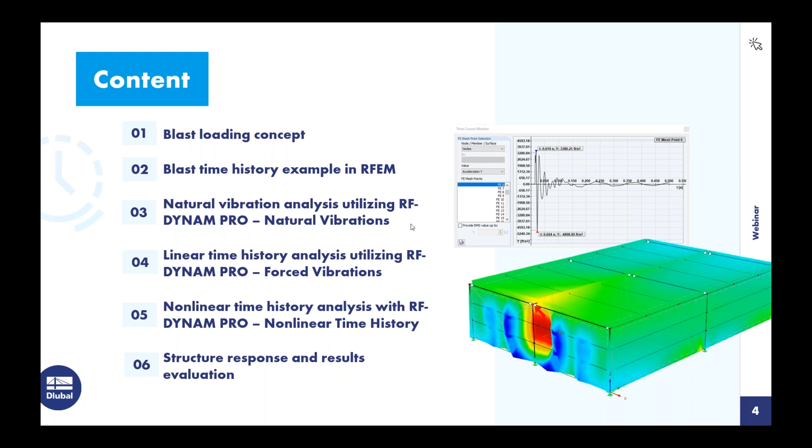Then we'll move on to a linear time history analysis utilizing RF-DYNAM Pro Forced Vibrations. Finally, we'll take into account any material or geometric nonlinearities with the additional add-on module extension, RF-DYNAM Pro Nonlinear Time History. Through all of this, we'll definitely be looking at the structure response as well as the results evaluation for each one of these.

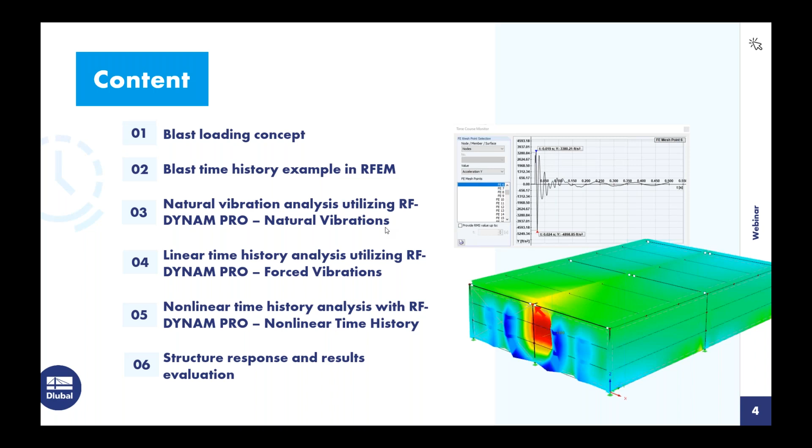Getting into the blast loading basics, as I mentioned we're primarily going to be referring to the AISC Design Guide 26, Design of Blast Resistant Structures. We'll also be making some reference to the United Facilities Criteria 3-340-02, Structures to Resist the Effects of Accidental Explosions.

There are many more references out there for blast time history, but for today's example I wanted to specifically refer to Design Guide 26, because this simplifies the time history analysis quite a bit and was just the best guide for today's example within the program.

What are the factors influencing structural damage when we talk about these types of explosions? Well, the structure material definitely plays a role, as well as the overall mass and stiffness. What else is important is the explosion type, as well as the distance to the structure. Clearly, a larger explosion in closer proximity to our target structure is going to cause a lot more structural damage than a smaller explosion located further away.

And finally, the blast orientation to the structure: is this located at ground level, is it up in the air, what proximity to the structure? And of course, if we're located in an urban environment, do we have surrounding structures that we need to consider as well? Now, the ultimate goal here is not necessarily to avoid extensive structural damage.

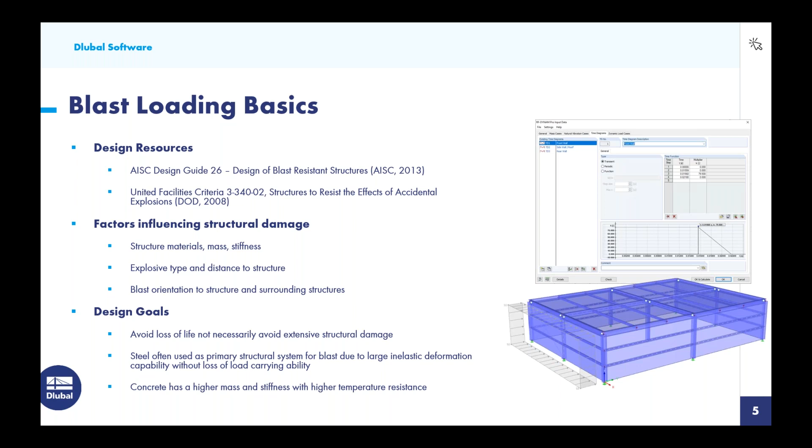Now, as far as the blast load application in terms of a time history, on the right-hand side we have what's called an idealized pressure time history for blast loads. There are certainly several theoretical approaches for exactly plotting this particular curve that we're seeing.

Just to cover a few of the basics, let's first begin with the peak overpressure. This is the pressure above the ambient atmospheric pressure, hence the name overpressure. It's an instantaneous pressure that arrives at the structure. In this diagram we have a short period where nothing happens until the time of arrival, then that instantaneous rise for the peak overpressure applied to the structure.

The positive phase duration is the time period it takes for the pressure to return back to ambient, or back to zero, indicated in the positive portion of the diagram. We also have what's called the positive impulse, which is the total pressure time energy applied during the positive duration — the area under the curve.

And finally, we have the negative phase duration. This includes the energy, again the impulse, which is the area underneath the curve that follows the positive phase, where the pressure falls below the atmospheric pressure.

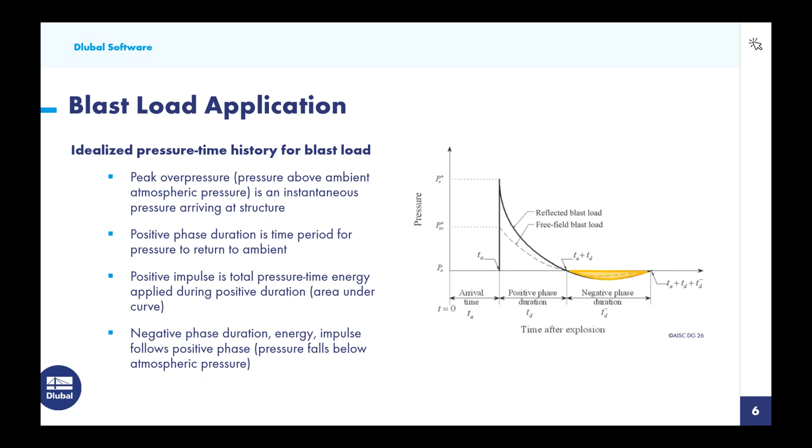Turning to the two different lines on this diagram, we have the reflected blast load shown in a solid line, and the free field blast load shown with a dotted line. So what exactly are the differences here?

We'll start with the free field blast load, indicated by the dotted line. Notice the magnitude is much lower here. This is what we call the free field or side-on blast load, where the blast wave travels parallel to a surface, sweeping over it with no impeding objects. We might see this with sidewalls, roof elements, or the rear wall, which is what we'll be noticing with today's example. Typically, in most literature, we'll see the subscript SO used for side-on.

Now we also have the reflected blast load, where the blast wave strikes a surface other than parallel, at an angle. A perfect example would be any surface normal to the explosion, such as a front-facing facade. Obviously, we're going to have much higher pressures here than with a wave sweeping over surfaces parallel to it.

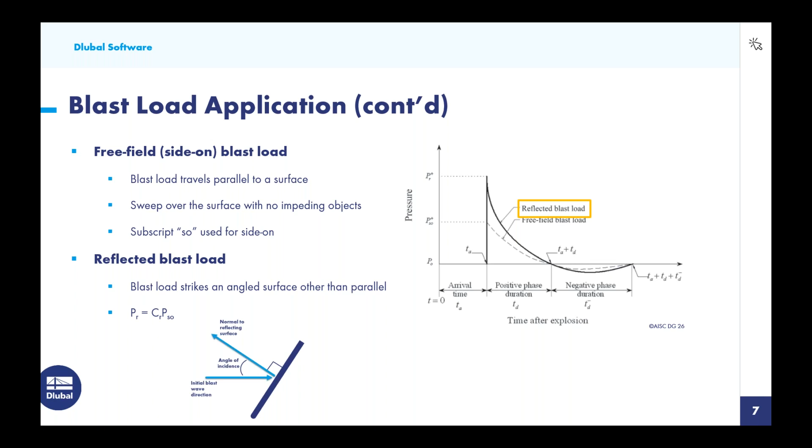So we calculate this reflected pressure with what's called the reflected pressure coefficient, multiplied by the side-on pressure, given by this equation. Referring to the UFC document, there's a nice figure here, 2-193, where you'll notice the angle of incidence given on our x-axis.

Then we would locate our peak incident overpressure, and follow this along to determine what our reflected pressure coefficient should be.

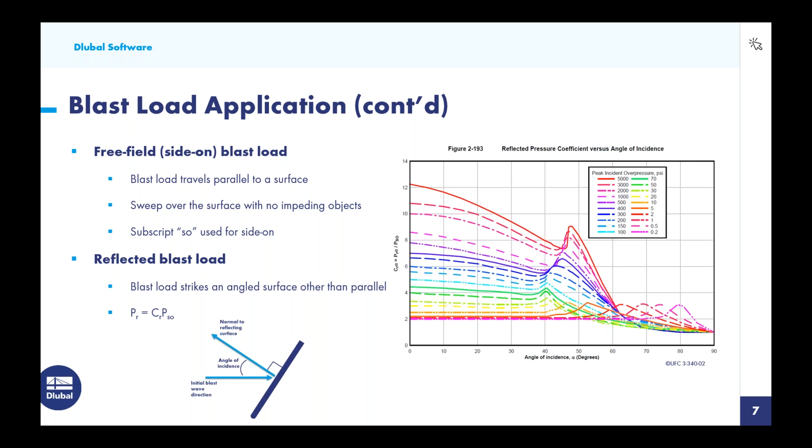So what exactly is the angle of incidence? If we look at this small diagram in the lower left, we have our initial blast wave direction. It will reflect off of this surface normal — a 90-degree angle here — which will produce an angle of incidence. This is the value we want to locate within this figure to determine what that coefficient will be in order to increase those reflected pressure loads.

So moving on to the blast load simplification, we're primarily referring here to AISC Design Guide 26. Let's first start off with the pressure time history positive phase.

What we're going to do here is simplify it to a triangular distribution, but we still want to maintain that instantaneous rise as well as a linear decay now — quite a simple application compared to the more theoretical approach shown in the background. It's important that the peak pressure as well as the impulse are preserved, and remember, the impulse is the area underneath the curve.

Therefore, we have to come up with some other fictitious duration in order to maintain both P and I. This is estimated to be approximately 2 times I over P.

When we're talking about the negative phase, we're actually going to neglect this for the demonstration today, just for simplicity. Now, as engineers, we don't necessarily always want to neglect this — it could be important when we have elements on our structure that are weaker in the reverse loading direction, or we should also consider it for short natural periods compared to the load duration.

Some other considerations we will not be taking into account today include the drag forces due to wind or dynamic pressures — do we have a large wind load following along with this blast wave as well? Both Design Guide 26 and the UFC document, among others, give consideration to these drag forces, and whether we have large openings to account for interior loads due to leakage.

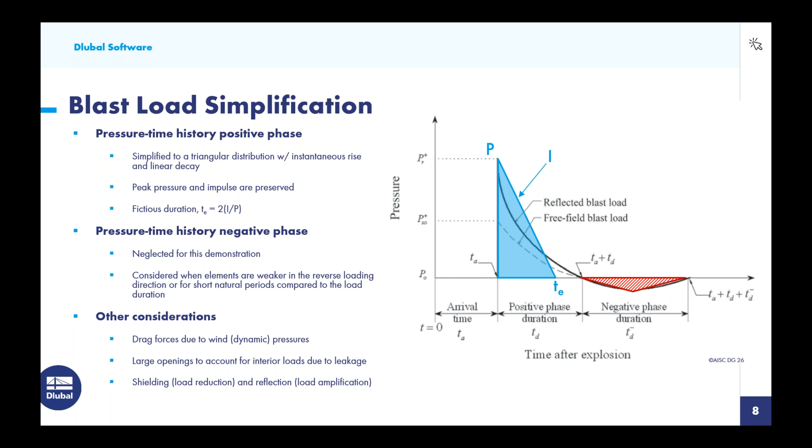On the positive side, we have what we can consider shielding, which is load reduction. When we have a blast wave and many other objects in front of our target structure, the load will be reduced. But on the downside, we have what's called reflection, where the load can actually be amplified because it's reflecting off of all of these different objects directly onto our target structure.

So let's take a turn now from these basics and take a look at RFEM, which is our finite element analysis software. This is the main program where we'll fully model the structure. We can load it with general static loads and run a full analysis.

But when we're talking about dynamics or any type of time history, we do need to utilize our dynamic add-on modules. We actually have a total of 4 of them. The first is RF-DYNAM Pro natural vibration.

This is a prerequisite. We have to go ahead and run the natural vibration analysis before we consider any of the rest of these dynamic analyses listed here. This is going to run the eigenvalue analysis, determine the mode shapes. We can take a look at angular frequencies, natural periods, and we'll definitely be doing that today.

The second add-on module, RF-DYNAM Pro equivalent loads. We actually will not be getting into this add-on module today. It's much more focused on seismic, and in particular a response spectrum analysis according to the ASCE 7, the NBC, and various international codes as well. I've done previous webinars on this topic, so refer to our website and YouTube channel if you want to learn more about that, but we won't be getting into that today.

RF-DYNAM Pro forced vibrations does allow us to run a limited response spectra analysis. We can also take into consideration accelerograms, but what we'll be utilizing it for today is to run a linear time history analysis for these blast loads.

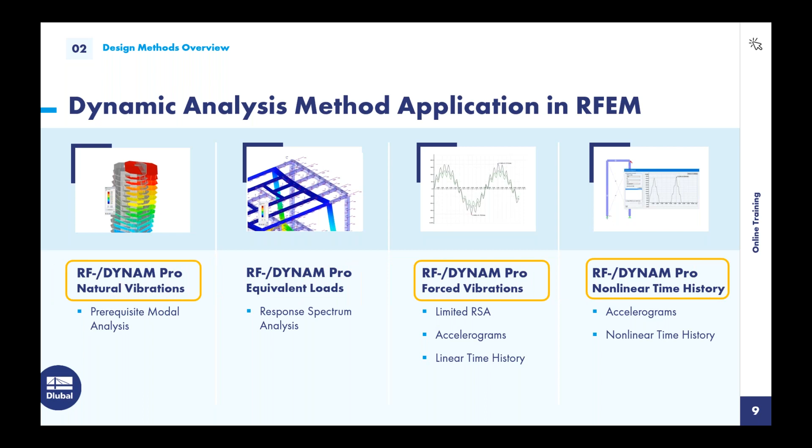So now moving on to our example. Again, I'll be referring to AISC Design Guide 26, and in particular example 2.1. The example within RFEM will follow very closely with this today.

We can see over on the right-hand side, directly from Design Guide 26, a plan view of our structure as well as an elevation view. It's a 1-story steel building and the dimensions include a 50-foot width, a 70-foot length, and then we have 15 feet in height. In the short direction, we will have braced frames, and in the long direction, we have rigid frames. Everything will be composed of hot rolled steel sections, and then for my roof deck as well as my wall panels, we will be modeling ribbed metal surfaces here.

Now, the blast load will take place, and we can see that indicated over here on the left, with a charge weight of 500 pounds, and it is 50 feet away from the structure. So we can see it's normal to this front short face here.

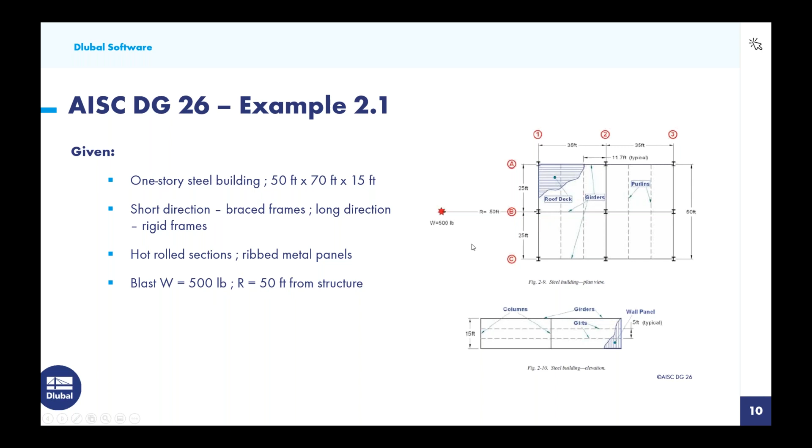So in order to consider the time diagrams for our time history analysis, we actually need to now move through the solution to determine what all of these different variables are. We begin with the scale distance, indicated by the variable z. Z is given to us by r over the cubed root of w, which is simply 50 feet away from the structure with a charge weight of 500 pounds. Then we're going to get 6.3.

On the right-hand side, you'll notice an additional figure taken from that UFC document, figure 2-15. This plot is showing the air blast parameters versus the scale distance. So we see the scale distance z that we just solved for on the bottom x-axis. Now there are some assumptions here with using this particular figure. You can see it's a positive phase shockwave parameters for a hemispherical explosion.

Not spherical, not located up in the air, but located at ground level and also at sea level. If you have a target structure that you're designing a blast load for something other than sea level, there are scaling approaches that you can take to scale this to meet those needs. It's also conservative here to assume a fully reflected surface, and that's what this plot is giving to us.

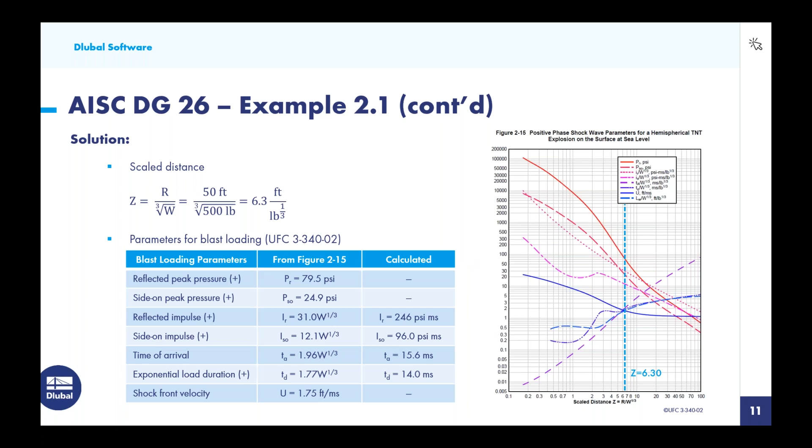Now let's talk about the reflected pressure. This would be applied to the front wall, and we are going to take the Design Guide 26 approach with the equivalent triangular shape. We want to utilize the peak pressure, P sub r, and the impulse, I sub r, and we want to preserve these values. We can see these given on the right-hand side, but remember, on the previous slide we got this information, P sub r and I sub r, directly from this figure. So it's easy enough to come up with this equivalent duration for the positive phase blast load with the estimated value of 2I over P, which equals 6.19 milliseconds. This is all that is required for our reflected pressure for the front wall time diagram.

Moving on to the sidewalls and the roof, what we'll be applying here is the side-on pressure. This is the smaller triangle within our idealized curve. For simplicity as well as the conservative approach, we're actually going to use the same scale distance Z that we use for the front wall centerline, also for the sidewalls and roof. Realistically, we could maybe calculate a larger Z to decrease our magnitudes, but again, for simplicity and the conservative approach, we'll just use those same values. Therefore, we need to calculate T sub E. We have P sub O and I sub O from the previous slide, so 2I over P equals 7.71 milliseconds. This is all that is needed for our time diagram for the sidewalls and the roof.

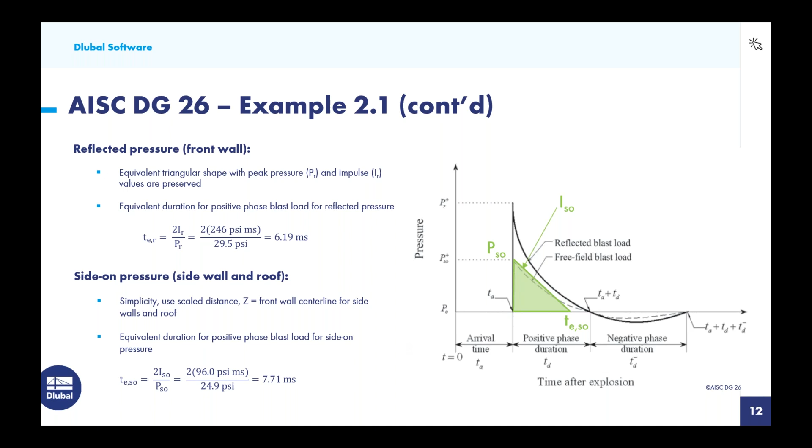Now the final step here is the rear wall, which is a little bit different than the previous two structure portions. The advantage here is that our charge distance is going to be increased. We have our blast taking place about 50 feet away from the structure face. We can also consider the full length of the structure of 70 feet, so our new charge distance is now 120 feet. We calculate the scale distance with that new R value and we get 15.1. So at the front of the structure we have Z equal to 6.3, and at the rear we have Z equal to 15.1.

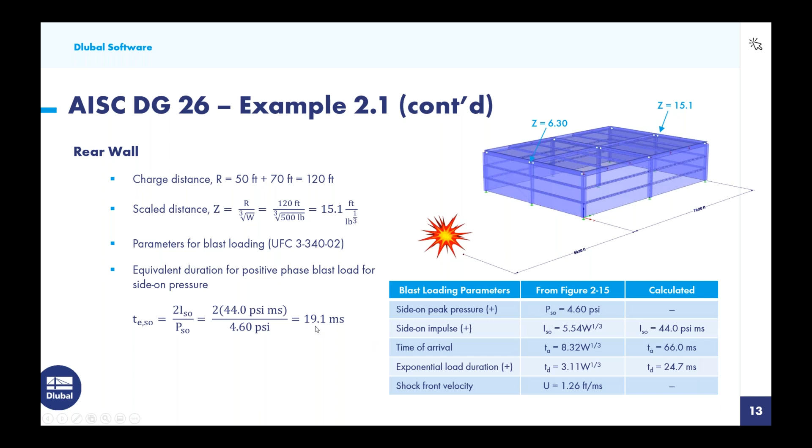Once again, we refer back to the UFC document to figure 2-15. We take a look at Z equal to 15.1, and here is a summary of all of our parameters. Notice that I only listed the side-on peak pressure and side-on impulse rather than reflected. This blast load is going to sweep over the rear wall. We don't have any type of reflected load occurring here, so that higher magnitude is not of interest to us. Now we do need to calculate that equivalent duration for the positive phase blast load, and again we run this calculation with 2I over P using this data with our new Z value, and we get 19.1 milliseconds.

Now it's also slightly different here in that for our rear wall, it's going to take the blast wave a little bit of time to ramp up to that full peak pressure. It's not instantaneous like what we're seeing with the front, side, and roof. So how do we calculate this? Well, we know the estimated time of arrival is 66 milliseconds.

We calculated that from figure 2-15. What we now need to calculate is this time to the peak pressure, T2.

That's really easy to calculate, because we'll take into consideration T sub A, the time of arrival, and add on L1 over U, where L1 is the span of the element parallel to the traveling wave. In our case, it's how long it takes for the charge to reach the top of the wall, which is 15 feet in height. U is the shock front velocity given to us from the UFC figure 2-15. So we take this length, divide it by velocity, get a time, and ultimately get 77.9 for T sub 2.

Now the time to the end of the blast is just going to be T sub 2, and we add on that estimated time we calculated on the last slide of 19.1 milliseconds, giving us 97 milliseconds.

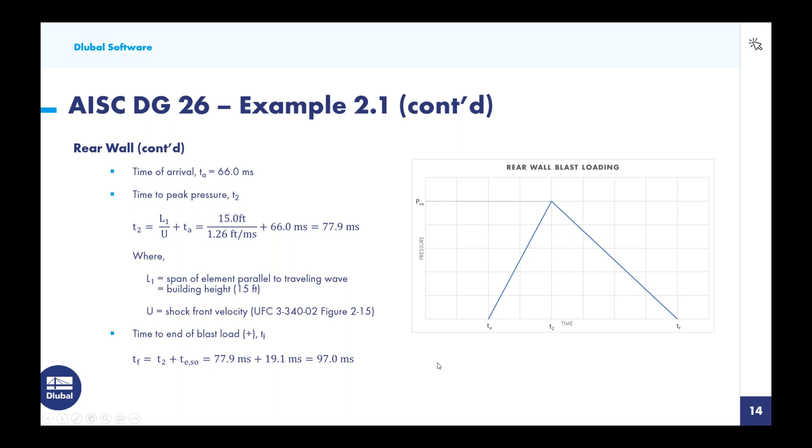A few assumptions I wanted to reiterate: we're using this equivalent triangular loading function over the more exact loading function. There are more theoretical equations, such as the Friedlander approach, if you wanted to calculate that curve exactly. We're also going to neglect the negative phase of the shock, as well as other variables I mentioned, like dynamic pressure, openings, and so on.

Finally, for simplicity, the full side-on pressures are computed for the non-reflected surfaces—this includes the sidewalls, the roof, and the rear wall. This is the full value here; in the UFC document, there are load averaging techniques to decrease this magnitude. So a lot of the approaches we took today are definitely more simplistic, but also more conservative. The UFC will have much more information if you want to get into more detailed analysis.

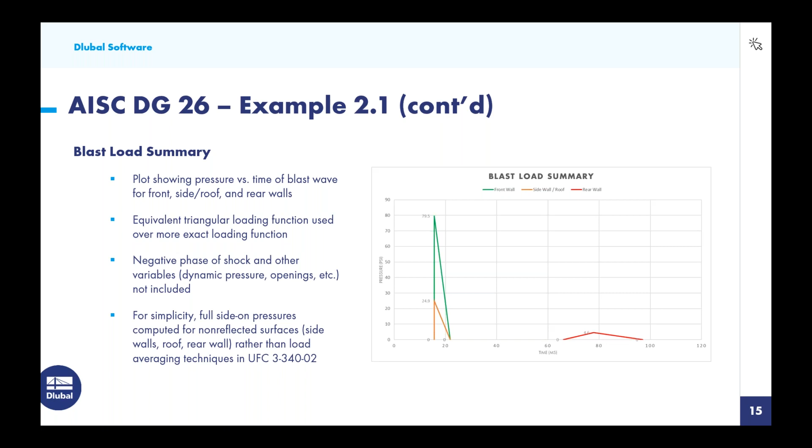All right, so now we're ready to get into RFEM. You'll see the structure already modeled here—this is exactly from the PowerPoint as well as Design Guide 26 that I mentioned. It's just a basic one-story steel structure, 50 feet in width, 70 feet in length, and 15 feet in height. We're going to assume the explosion happens over here on the left-hand side, normal to this front face.

To quickly cover a few of the cross sections used in this example: for my columns, I have W14 by 193. Up at the roof, we have W18 by 130, used for the main beams and main girders. We also have our purlins, which are channel sections—channel 10 by 25. And then we have our girts, which are again channel C10 by 30 sections.

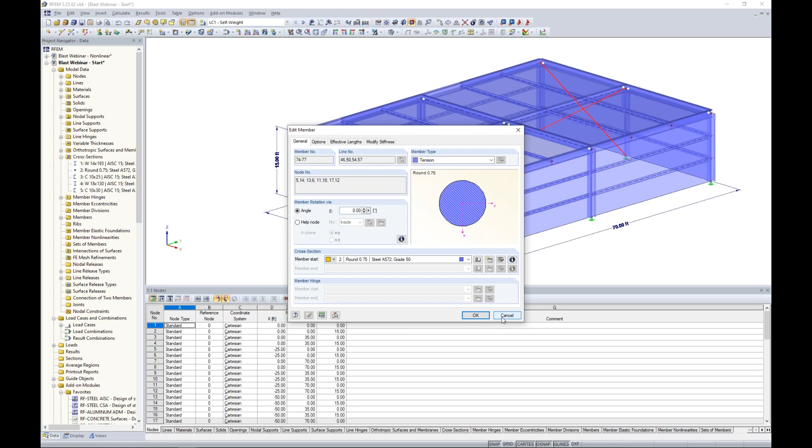It's also important to know—if I highlight these elements—we have a couple of X braces. Remember in the problem statement, we have braced frames in the short direction and moment frames in the long direction. I added this lateral bracing here, and if I double click on it, you'll see these are tension-only members, so in the program they will take only tension forces—some type of cable element, we'll assume. When the program experiences compression within these elements, it will completely take it out of the analysis, but RFEM, being a nonlinear analysis, can reactivate these if we see tension again in a subsequent iteration. So let's keep that in mind for those X braces.

Now, looking at the surfaces, for both the roof and the walls, what I went ahead and modeled here are orthotropic stiffness surfaces.

And it's just a general steel A653 grade 40 material.

When we go into the detail settings of this orthotropic stiffness, we'll see that I have set this to a trapezoidal sheet. What's convenient with this option is under the second tab, I can simply put in the sheet thickness and some of the geometric variables for my ribs, including spacing and so on, and the program will automatically calculate my stiffness matrix for me.

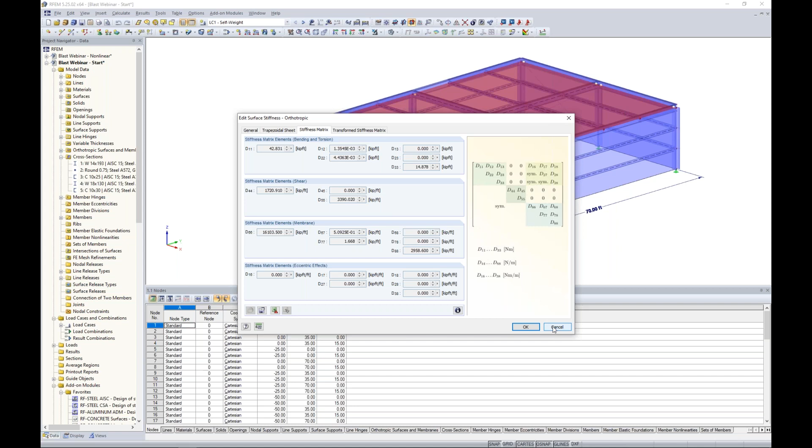So this is definitely going to add a lot of lateral stability to our structure at that roof level. I went ahead and used it for the wall elements as well. That is a basic overview of our surface elements as well as our members.

So under my display, what I'll do is go ahead and turn off my dimensions here. And let us discuss the loading.

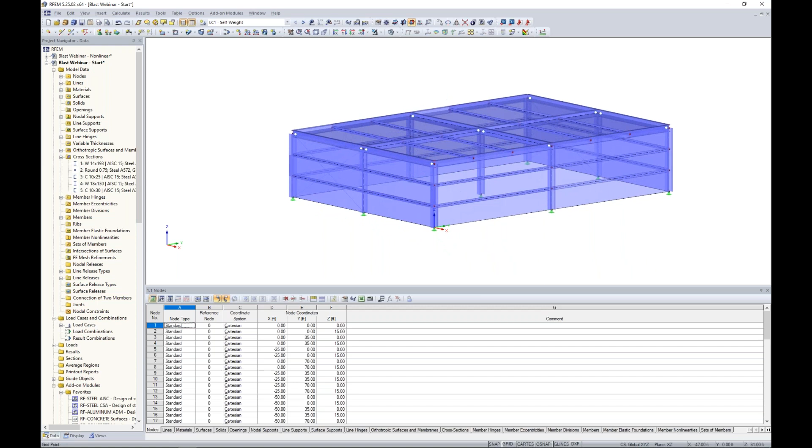I've created 4 separate load cases here. The first is going to be self-weight, and the self-weight is exactly as it sounds - it will account for the self-weight internally of all of our members and surfaces automatically. But I've also added in a general member load up at the roof level to those main beams and girders, 0.1 kips per foot, to account for any additional dead load that we may have up there.

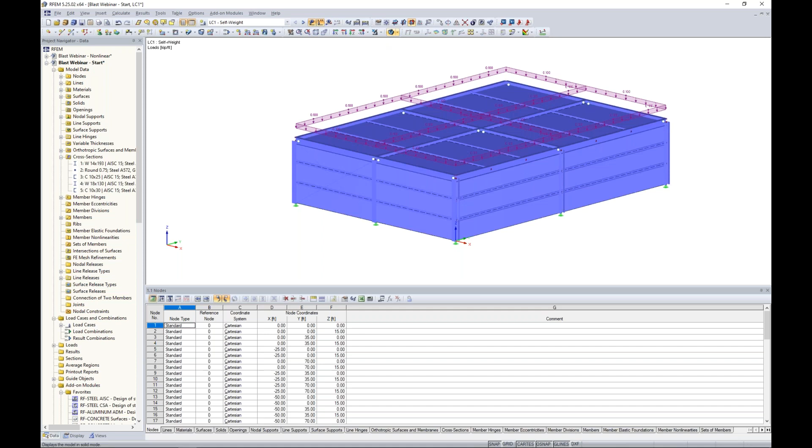Now the next load is going to be for my front wall, and we can see this load applied as an area load. This is to initially account for that blast load acting on this front surface. So this area load here is a bit special because it's going to convert the area load to member load.

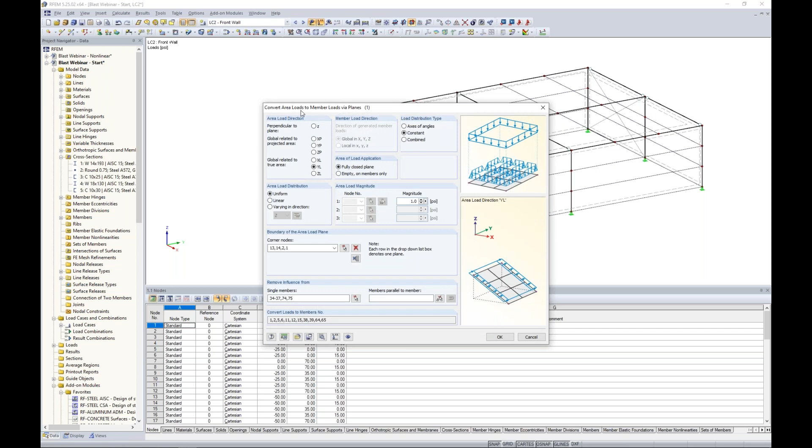So I'm not necessarily applying it to this surface, but rather I want it to be applied directly to these main lateral resisting frames. And you can see that the magnitude is set at 1 psi.

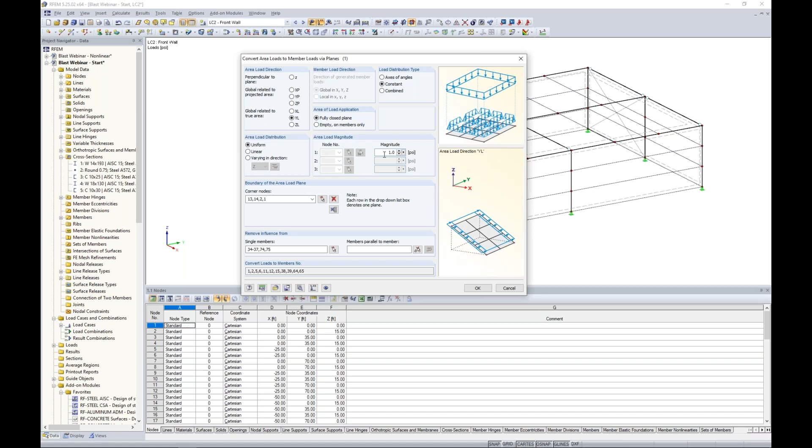We want to use a very arbitrary value of 1.0 here. Later on in the time diagram, I'm going to tell the program how this magnitude will increase or decrease and vary over time with the actual time history analysis. But for now, we want to set this to 1.0.

So you can see that with this front area load, if I right click and display separately, we can see those as member loads based on their tributary width applied directly to those frame elements.

In a similar fashion, if we take a look at load case 3 here, we have area loads on the sidewalls as well as area loads on the roof. Once again, all of the magnitudes are 1 psi. If I right click and display separately, you'll notice that I applied them to those main frame elements.

I did not apply them to any of the channel sections for the girts or the purlins, and again I did not apply directly to the surface. I'm more interested in the structural response of these main elements included in our frames.

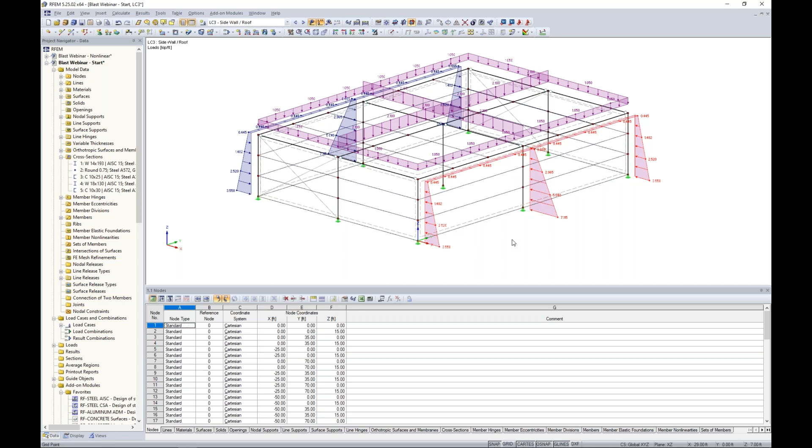And finally, we'll take a look at our last load case here, and we have an area load applied to the rear of the structure, normal to that rear facing wall, 1 PSI. I can right click to display separately, and we see those member area loads applied directly to those elements as well. So a very basic application here.

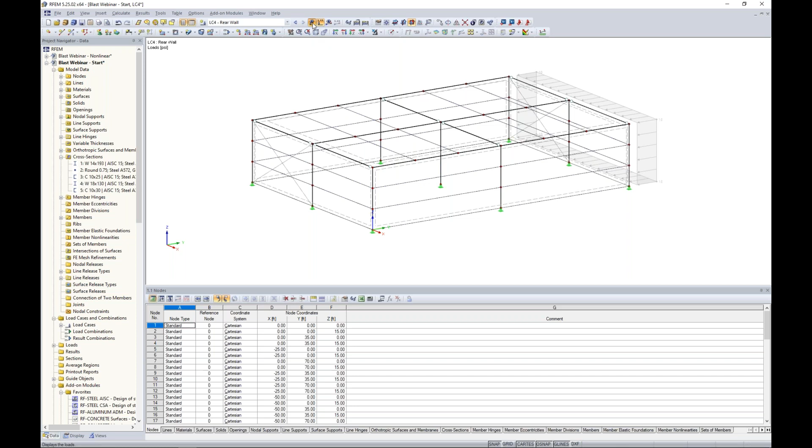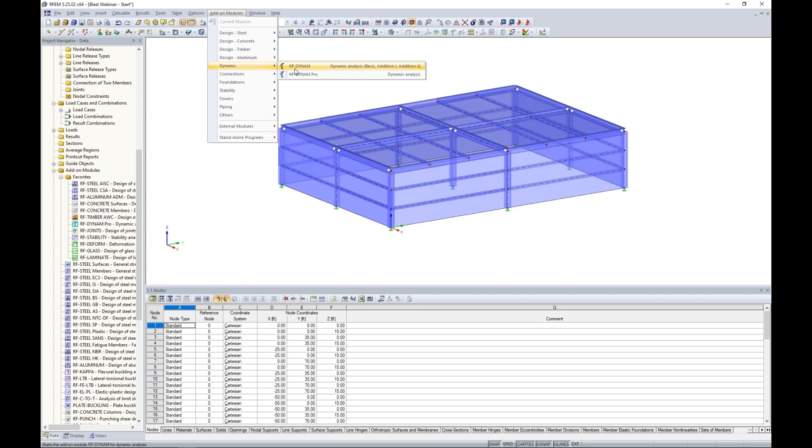Now we're not going to spend any more time within RFEM, but rather we want to move into the dynamic analysis. So what I'm going to do is launch RF-DYNAM Pro, and we can see in our project navigator here is our long list of add-on modules. So you can find RF-DYNAM Pro here, or we can go up to the add-on modules and find it categorized a little bit better under dynamic, and we launch RF-DYNAM Pro.

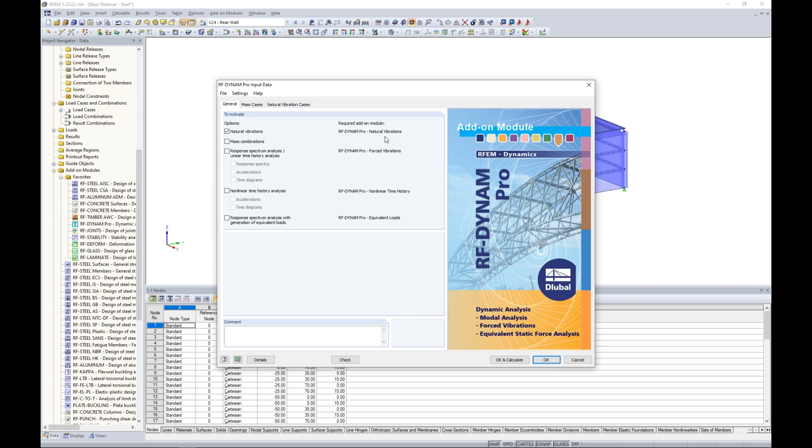So this add-on module is going to be nothing more than just a simple dialog box that pops up, and here are those 4 different dynamic modules that we discussed in the PowerPoint. You'll notice by default, the first one activated is RF-DYNAM Pro natural vibration. So again, this is a prerequisite - we have to run this natural vibration analysis before we move on to any of the additional add-on modules.

I also can activate here my mass combinations tab, and we'll get an additional option here. This is if we wanted to combine multiple mass cases into a combination. I won't be doing that for today's example, but that is an option.

So really, we just need to move from left to right here with our tabs. So the first mass case, I'm actually going to import in, if you remember, that first load case, which includes self-weight as well as that member load applied to the roof structure for those various elements.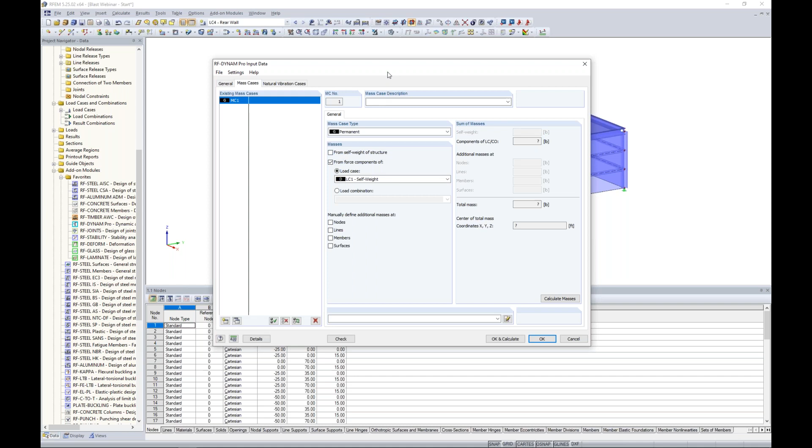Now I'm going to uncheck self-weight of structure here. If I leave this checked, we're accounting for self-weight twice, which would be incorrect. We also have the ability to define additional masses at nodes, lines, members, surfaces, and we can deactivate masses, so there are a lot of possibilities here.

For now, we'll just stick with this single mass case and move on to our natural vibration cases. We want to initially tell the program how many eigenvalues to calculate. For my structure today, I'll set this to 30. The scaling of the mode shapes will be left as the square root sum of the squares, and we can move on to the calculation parameters.

Under this dropdown, we want to select either our mass case or our mass combination of our acting masses that we want to consider for the natural vibration analysis. In our case today, we only have one mass case, so that's what's available.

As far as the directions or about which axes this mass is acting, this is somewhat dependent on the type of mass matrix. With the diagonal matrix translational degrees of freedom, some of these options above are grayed out, but as we scroll through these - translational and torsional degrees of freedom, rotational - we have different options available to us. So we'll be moving forward with the diagonal matrix translational degrees of freedom for today.

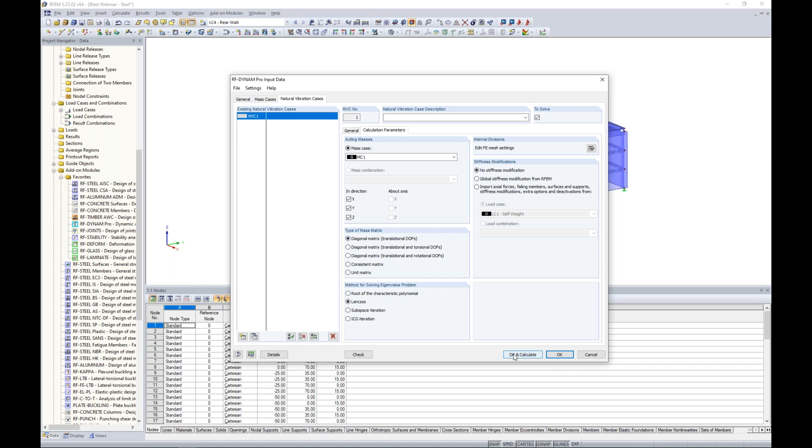As well as the general Lanczos solver. Our help file, which you can locate at the lower left-hand corner, will give much more theoretical background on some of these different options and how it might improve the calculation for your particular structure. So once we are done setting all of our natural vibration case data, we can go ahead and run the calculation, and you'll see for today's example this solves rather quickly.

So we are presented with our results of the dynamic analysis back in RFEM. We're technically still within this add-on module, which we can see from the dropdown box here. We also want to view this information in Table 5 for dynamic analysis.

Let me go ahead and redock my tables here. What you'll notice within this table is the natural vibration case is given to us within this dropdown - that's all that we've solved for. But right next to us are all 30 of the mode shapes that we told the program to solve for. So we can scroll through these different mode shapes just to see how the structure is responding under the given frequencies.

I always recommend immediately jumping to this effective modal mass factors tab. If I scroll all the way to the bottom, this tells me the mass participation. It's shown at 95% in the X direction for a sum of all 30 of our eigenvalues, and 96% for a sum of all the eigenvalues in the Y direction. This is great mass participation - we like to see something around 90% or more.

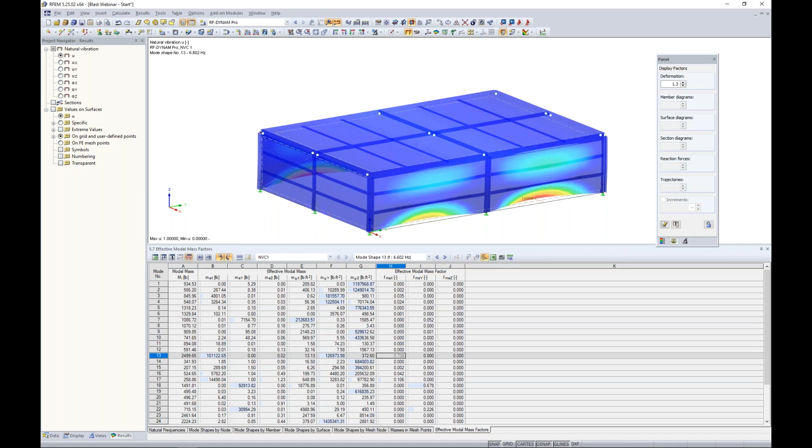What else I want to pay careful attention to is what we call the dominant modes. If I look at a lot of these early modes, they really don't have much mass participation going on until we get down to mode shape 13, where we have 74% participation in the X direction. Then going a little further, I see my dominant mode in the Y direction - this is 68% in the Y direction.

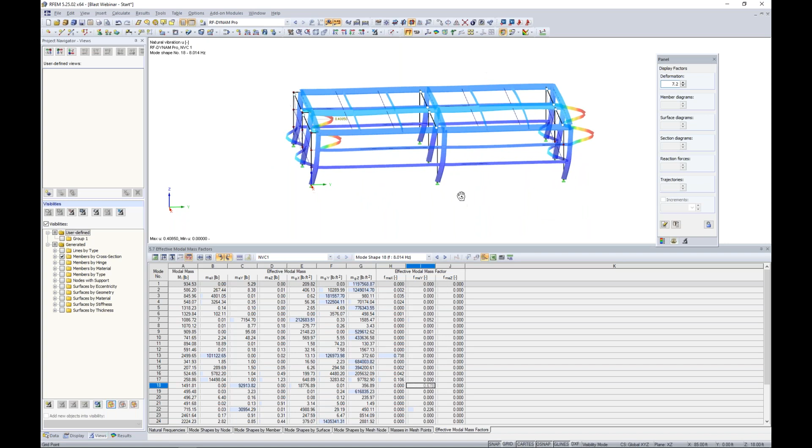What might also be helpful is under our Views tab, we can deactivate our surfaces here. Maybe we increase our deformation so we can really see a response of the structure as a whole. Now, of course, there are some more local modes with these girts, but overall, this is certainly our dominant mode in the Y direction.

Keeping in mind mode shape 13 and 18, we jump back to this first table, natural frequencies, and I'll highlight mode shape 13 as well as mode shape 18. For these two dominant modes, I can now determine my angular frequency, my natural frequency, and my natural period. We might be thinking, well, what does this really matter for a time history analysis? But this actually does come into play a little later when we're talking about damping considerations. We'll leave this highlighted in the background for now - it's great to understand which are our dominant modes for the structure from the natural vibration analysis. So let's go back into RF-DYNAM Pro then.

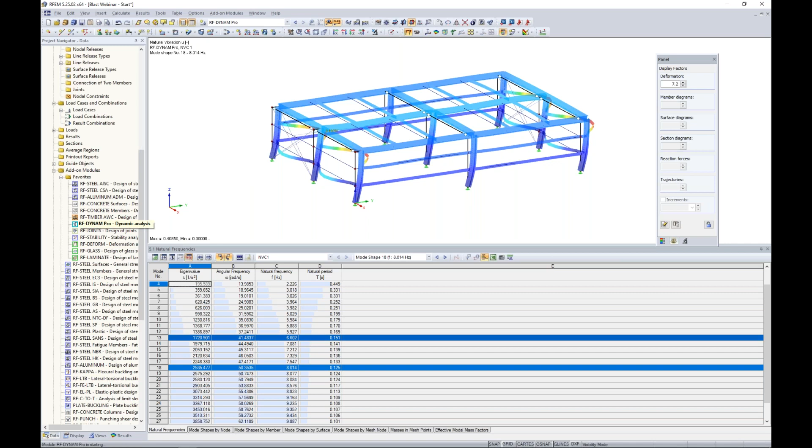And what we can do now is activate RF-DYNAM Pro forced vibrations for time diagrams. We get two additional tabs up at the top. Everything that we've just input for the natural vibration case remains the same, so no changes to be made there.

But now we want to move on to our time diagrams tab. This is where we are going to input the information that we solved for within the PowerPoint, to tell the program how these loads that I've applied back in RFEM as load cases will vary with magnitude and over time due to this blast load. So the first time diagram we want to specify is going to be our front wall.

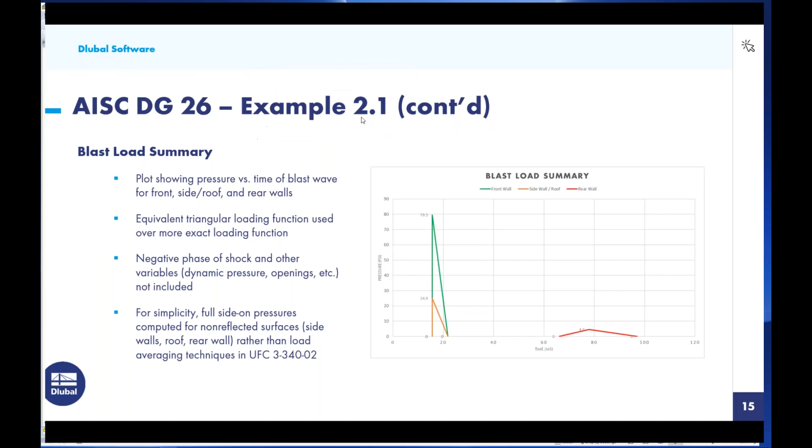I am going to jump back here to the PowerPoint just to give a little refresher. We might be interested in seeing again what the time diagram would look like for this front wall. Using the simplified approach, we have a short time period until the time of arrival, an instantaneous pressure up to 79.5 psi, and then a linear decay back to 0. All of our points are given here in terms of pressure and time, and this is the information we want to input into the program.

For the first time step, we will specify a transient option. Transient just means that we can input each individual time step here, which is what we'll be utilizing today. In turn, we can utilize a periodic option, which would be interesting for rotating machinery, for example, where we put in an angular frequency as well as a phase shift. Finally, there is the ability to input a function.

We can actually define variables and parameters. This would be extremely useful if we were taking the more theoretical approach for the idealized pressure time history curve, for example the Friedlander equation, which we could actually input. We do have some additional resources here that I can relay to you if you're interested in seeing that more theoretical approach with this function option. So just reach out to us if you are interested in that.

But for today, taking this transient approach with the more simplified application, we want to go ahead and input these time steps. The first time step will be 0, 0. The second time step will be 0.0156 as well as 0. Then we have 0.01561 with a pressure of 79.5 psi, and then we will have 0.02180 and 0. This looks identical to what we just saw in the PowerPoint.

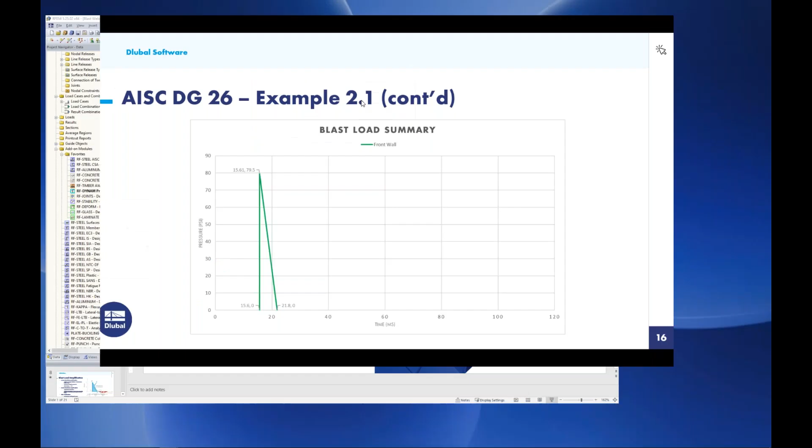The next time diagram, we will simply take a copy of the front wall and rename this to side wall and roof. Going back to the PowerPoint, let's get a quick refresher on what this should look like. Remember, the time diagram really looks identical to what we just saw for the front wall, with the difference that our pressure is going to be much less here, only 24.9 compared to the 79.5 for the front wall, because this blast wave is just sweeping over these surfaces rather than reflecting.

So once we have these input points here, we go back to RFEM. Remember, the time is going to stay the same in this first column. All that we need to do is go ahead and change the magnitude here, or multiplier, to 24.9. And here is our second time diagram.

Now, the third time diagram will be for our rear wall. What I want to do, once again, is refer back here to a nice summary. We don't necessarily have that instantaneous rise in pressure, but rather we're going to see a linear rise in pressure over a certain time period, and then a linear decay back to zero for this rear wall. This is also occurring quite a bit later in time, relatively speaking, than what we're seeing with the front wall, as well as the side walls and roof.

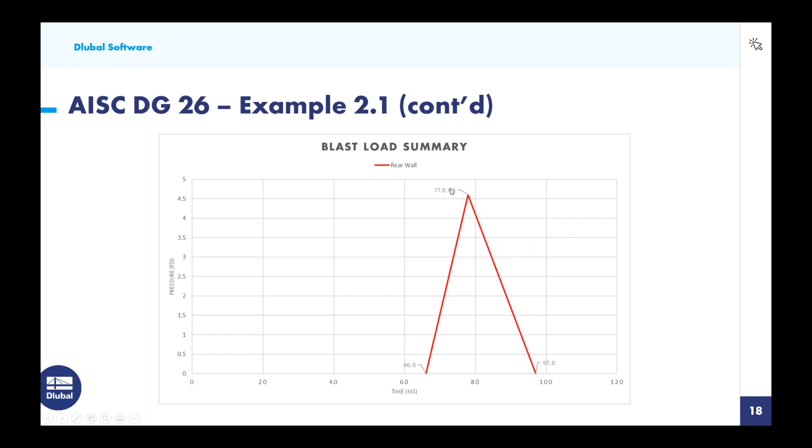So we want to take note of all of these various points. We can see here that our max pressure is only 4.6 psi, so much, much lower. Going into this last time diagram, we want to input our points. We'll choose 0, 0. The second point will be 0.0660. The third point will be 0.0779 and 4.6 psi, and then 0.097 and 0.

And it looks like we lost that one,

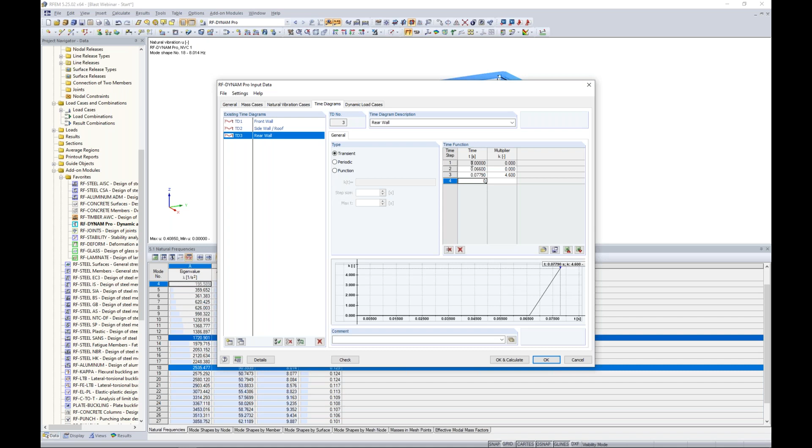0.097 and 0. Okay, so here is our time diagram for our rear wall. Notice that these are just multipliers. So when I say 4.6 psi, all that we're going to end up doing is relating it back to those load cases that we set in RFEM with 1 psi. It was important to use 1 psi because we'll use this multiplier to affect the magnitude over the time duration.

All right, so once we have input all three of these time diagrams, we can finally move on to the dynamic load case tab. This first dynamic load case I will title linear. Notice only our linear solvers are available to us. The rest that are grayed out are all related to other dynamic add-on modules we do not have activated. We will be utilizing a linear implicit Newmark analysis solver, and notice that the natural vibration case is completely grayed out here. That's because we do not use this information for this particular solver. This is in comparison to the linear modal analysis, which heavily depends on that natural vibration case.

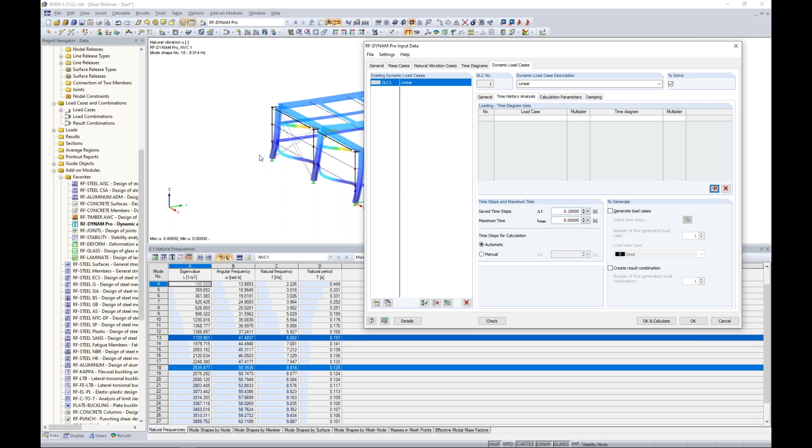So with the Newmark analysis, we can move on to the time history analysis. This is where we are going to relate those load cases back in RFEM. Remember the front wall area loads, the side and roof area loads, and finally the rear area load. We relate this to the relevant time diagram. So the load case here, front wall, is going to be related to my time diagram front wall.

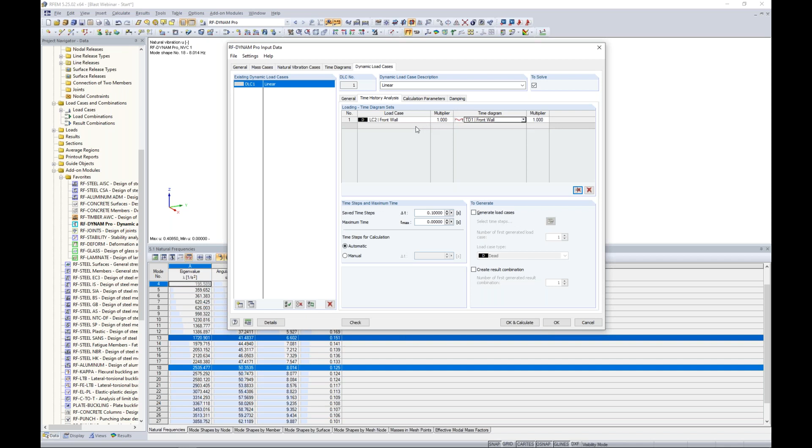This is telling the program how to adjust the magnitude over the full duration of this blast analysis. The second set will be our sidewall roof related to our sidewall roof. And finally, we have here our rear wall, which will be related to our rear wall.

Now, as far as the saved time steps, when we set this to a higher value, it really has nothing to do with the analysis. It's just what is going to be shown to us back in RFEM when we review the results. By setting this to a larger number, we're definitely going to reduce the file size and shorten the calculation. But if we do not have enough time steps, then we're not going to accurately capture the results. So some of those max and mins, we want to have nice smooth curves for something like our time course monitor.

So for example, today we'll set this at 0.001. Now, the maximum time will only be 0.5 seconds. This is a very short duration, and we don't need to set this to something like 10 or 20 seconds, because everything is happening so quickly in milliseconds that 0.5 seconds will accurately capture what's going on with the structure response.

Now, the time steps for calculation, this is important for the analysis internally, and it's really a compromise between calculation time and accuracy. There is the automatic option. You can refer to our help file if you're interested in determining how the program will set this automatic time step, but I think for something like a blast analysis with such a short duration, it's a little bit better to have full control over what time step you're using.

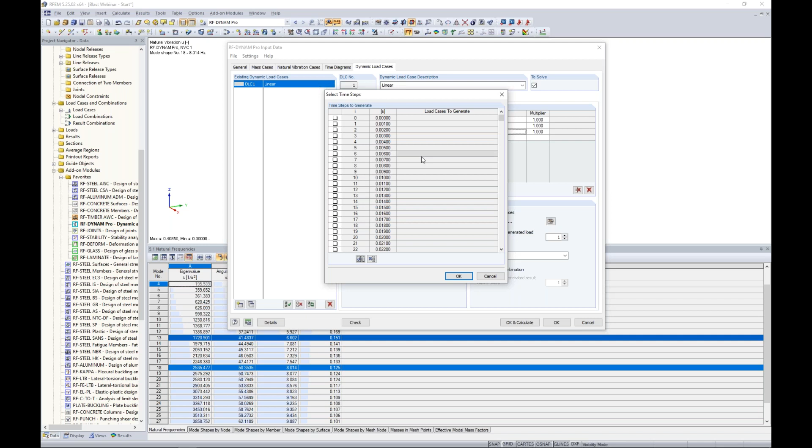We do have the ability to export out load cases here for each one of these time steps. You can see that when I go into the details, I can turn on and off the various time steps that I'd like to export out as load cases. But keep in mind, it's a little deceiving because we're not exporting out the loads. We are exporting out the results for the selected time steps. So we won't be doing that today, but the other option is to export out a result combination. This is going to be an envelope solution for all the time steps that we've considered here.

We can combine those result combinations with additional static loads if we'd like.

The calculation parameters: remember, the program knows nothing about the natural vibration case based on the Newmark implicit solver, so we need to redefine the acting masses here. We leave this as we've already set before, mass case 1, diagonal matrix for translational degrees of freedom.

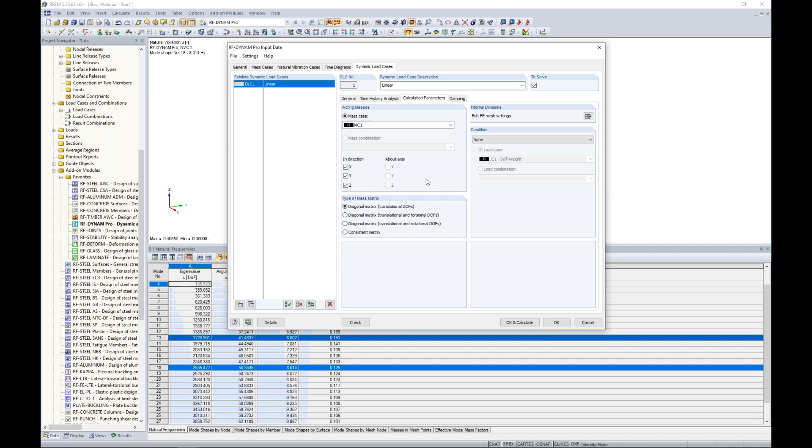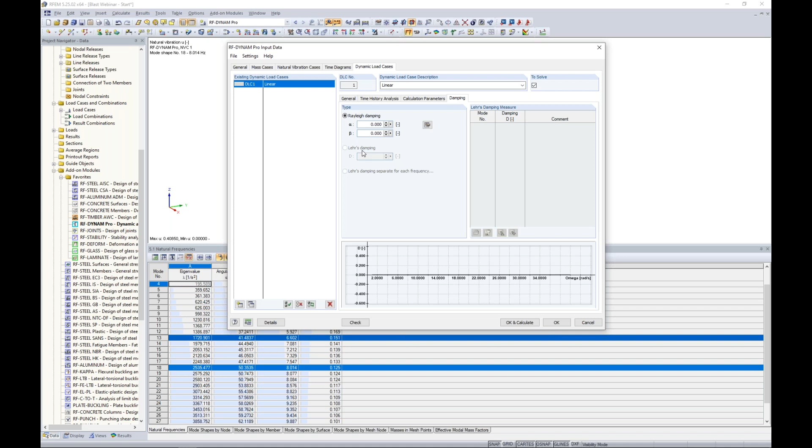Finally, we have our damping consideration. When we're talking about the Newmark solver, we have to think about damping in terms of Rayleigh, and most of us are likely more familiar with Lehr's damping. For a steel structure, Lehr's damping might be around 2%. We just need to do a simple conversion here, an equation with two equations, two unknowns. We can easily calculate both alpha and beta based on the Lehr's damping that we want.

Alpha is going to relate to the mass portion of the damping matrix, while beta relates to the stiffness portion of the damping matrix. So we can either do that manual calculation ourselves, or we have a nice tool here. This tool allows me to input a couple different mode shapes for the angular frequency, as well as my desired Lehr's damping.

This is why I have saved in the background mode shape 13 and mode shape 18. Remember, those were my dominant modes for that natural vibration case. So I can input my angular frequency for mode shape 13, which will be 41.48, and the damping consideration will be 0.02 for Lehr's, so 2%.

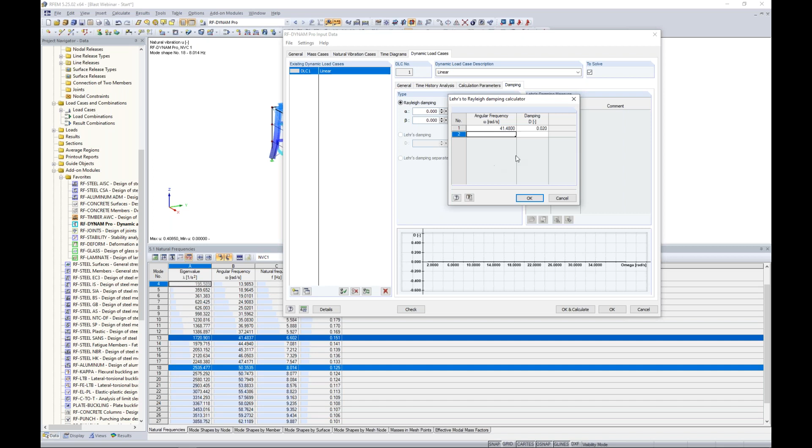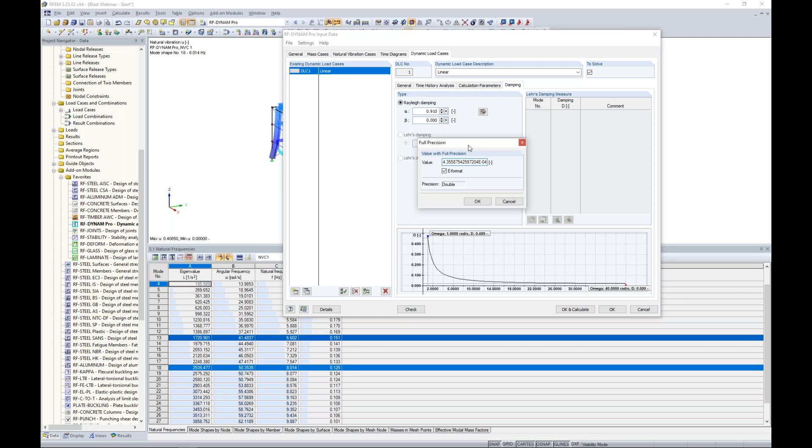Same process for mode shape 18. This time our angular frequency was calculated at 50.35, just given to us here in the background. I want Lehr's damping to be 2%. I click OK, and the program automatically calculates alpha and beta for me. Beta may look like its value is 0 here, but if we go into full precision we can see it's just a very small number, 4.36 times 10 to the negative 4.

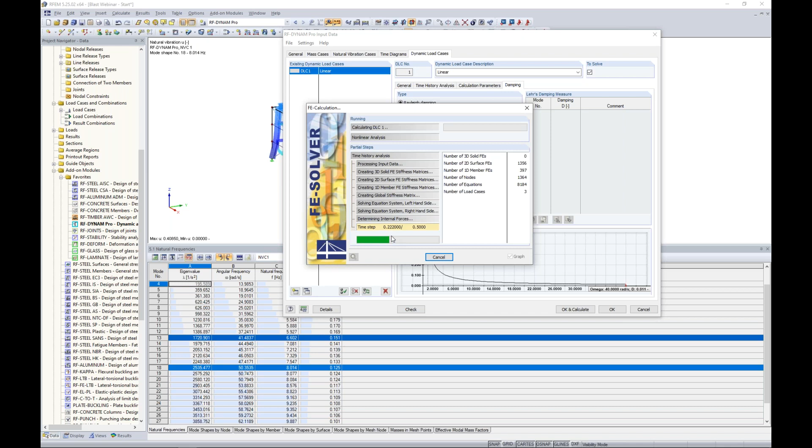Once we have input all of our information for this initial linear time history analysis, we can run our calculation. For a linear calculation, it actually solves pretty quick. We have our progress bar shown at the bottom, and we set our time step at every 0.001 seconds, with a total duration of only 0.5 seconds.

Once this is done solving, we're given back into RFEM here, and I'll go ahead and cancel out this visibility. We're technically still within this add-on module, RF-DYNAM Pro. We go to table 5 here. Under my dropdown, I have my natural vibration case, but now we have our dynamic load case as well, and right next to that is going to be all of our saved time steps.

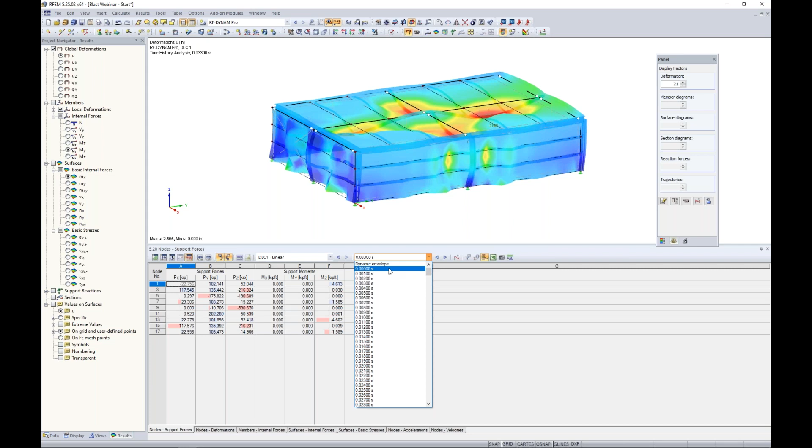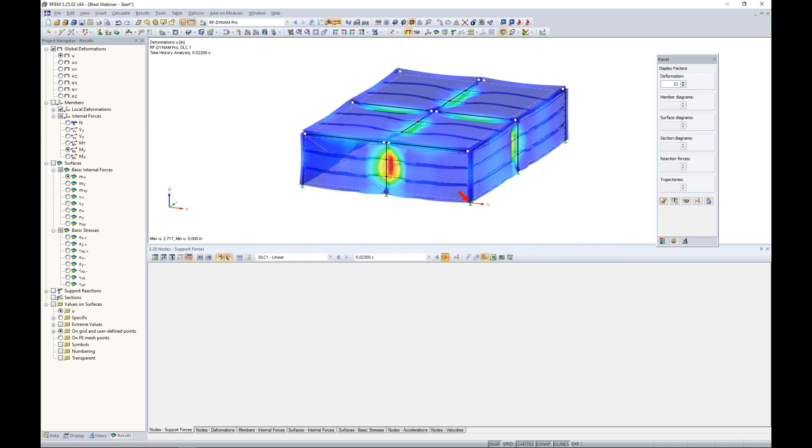So if we're looking currently at the global deformation here, we have time step 0. We can actually scroll through these, and remember, nothing's happening on our structure until we have that estimated time of arrival at about 0.016 seconds, and that's where we start to see this blast load impact our structure. We continue scrolling through these different time steps to slowly see that wave load travel from the front of the structure to the center and the roof, and clear back to the rear of the structure.

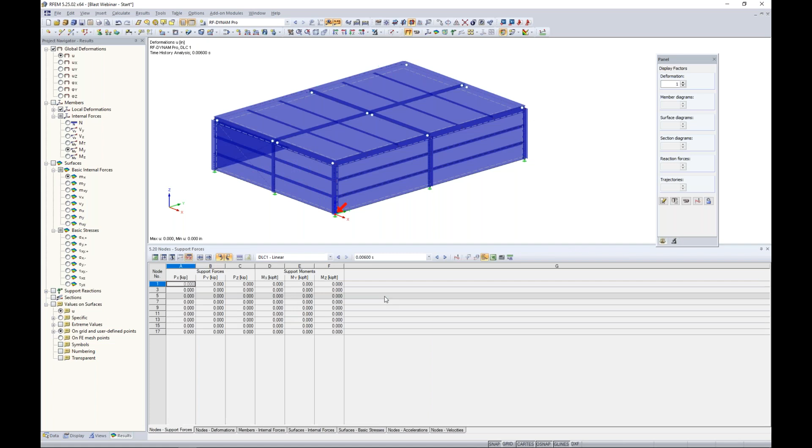Now, for any one of these time steps, or the dynamic envelope up here at the top, all of our results are given to us in table format. We'll see member internal forces, we can view node deformations, stresses on our surfaces. We can export all of this information to Microsoft Excel at the click of a button if we wanted to do some further sorting. We can also view all of this information graphically with our project navigator.

What I think is most of interest, though, when we're talking about a time history analysis, is a time course monitor. We can go ahead and launch that directly from our table tools here, and I can graphically select a single node, for example. With this node selected, the program automatically updates my time course monitor.

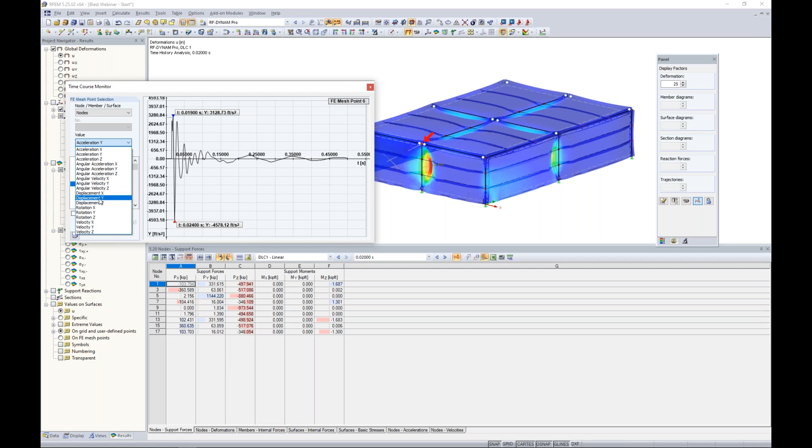Let's take a look at the acceleration in the Y direction. We can see here the acceleration at this particular node shown over the full duration of the 0.5 seconds for our time history analysis. And if we want, we can turn this to, let's say, displacements in the Y direction. So we're seeing these large displacements, and they're slowly dissipating over time.

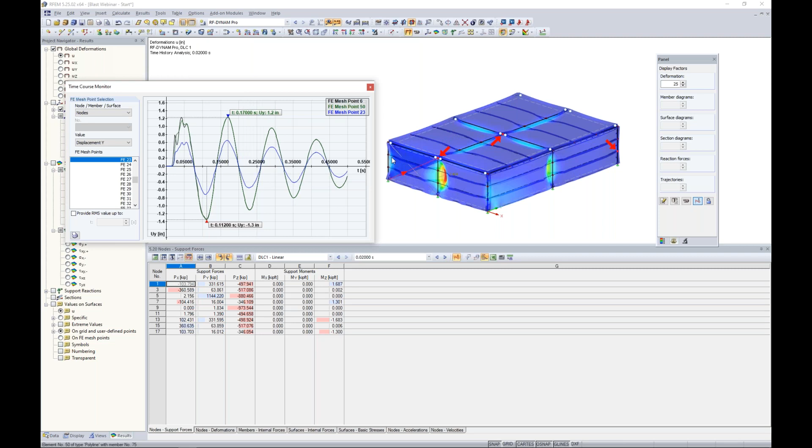We also have the ability to hold down our control key, and we can select multiple nodes if we'd like to generate them on the same time diagram. You'll notice that those will just be overlaid here. We can right click, view these as numeric values, and we can export this information to Microsoft Excel as well.

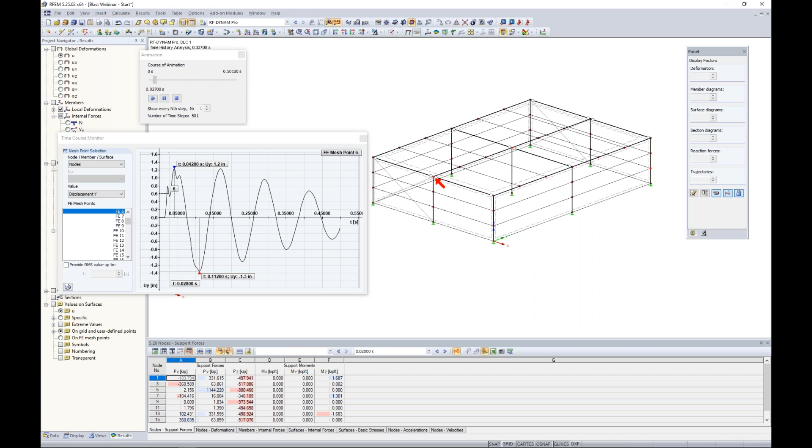So it's pretty powerful what we can do within these various time course diagrams. Now, also within this option here is the ability to view animations. So if we take a look at our structure and turn on our animation mode, when we play this and turn on our global deformations, we're going to see the structure response of these deformations over time. We'll be able to see how these surfaces and members are moving. You can see that the time course monitor is slowly moving from time step to time step.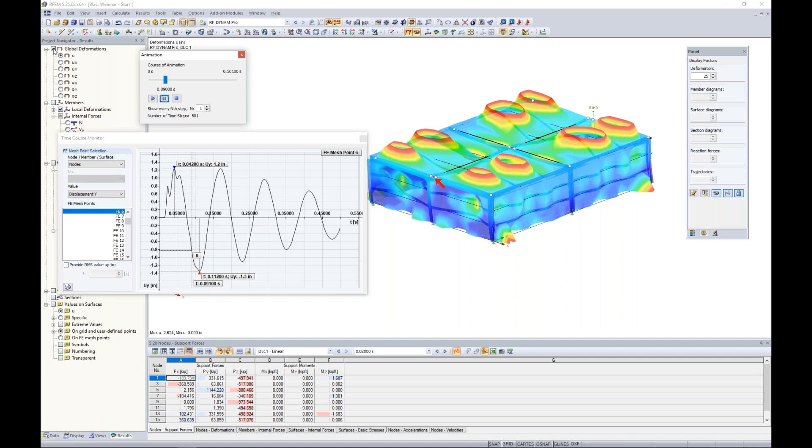This information that is plotted here is important for those saved time steps, to make sure that we get nice smooth curves here for our particular analysis.

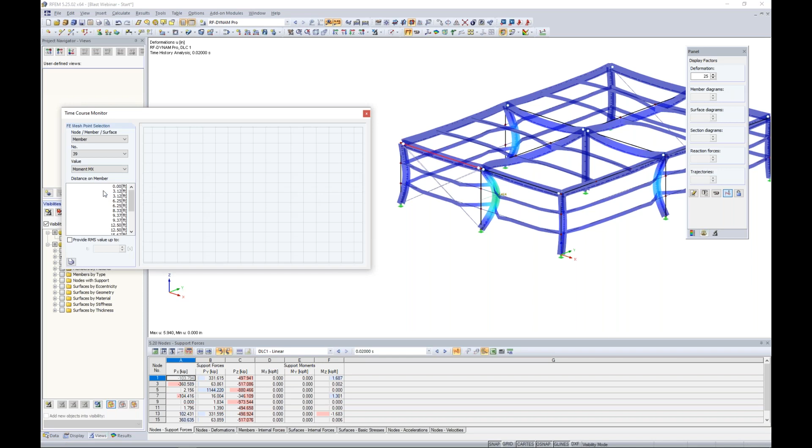The other thing that is of interest to us is some of the internal forces for our members. Let me turn off the display of our surfaces just so we can get a clear view of our member elements here. And we'll select this member, one of our front beams. We can take a look at our moment, for example, about the global x-axis. We can see we're definitely seeing higher moments early on with this blast impact analysis, and then it will slowly dissipate over time as well.

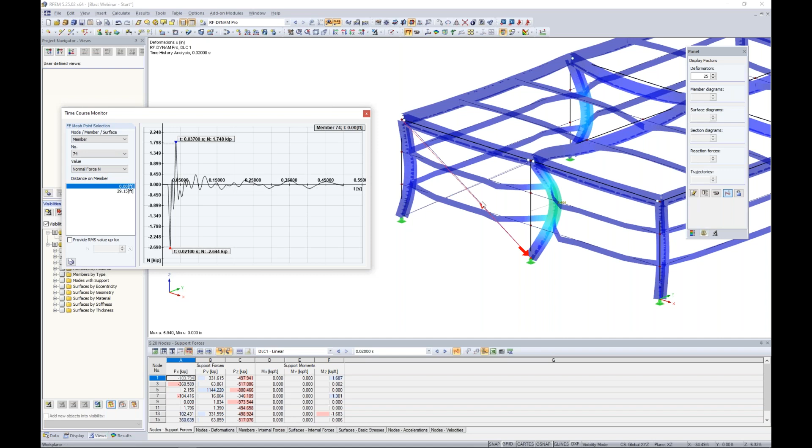If you remember, what else is of interest to us is this tension only member. With the tension only member, we technically should see only tension forces. So I'm taking a look at this within this time course monitor for my normal forces for member number 74, and we can see it highlighted here. But here's the problem: we're seeing compression forces of negative 2.64 kips. That is telling me that this cable element is taking on a compression load of 2,600 pounds. And we certainly know that that cannot be the case.

So why is this? Well, this is simply a limitation of the linear solvers. Any non-linear element, so when we're talking tension-only members, they are going to be automatically converted into truss elements for the linear analysis. The program only knows what it knows, and if it sees a truss element internally, it's going to think, okay, well, then it can take on these high compression loads as well.

There's nothing stopping it. Same thing with nonlinear supports. So if we have supports that are failing in uplift, sure, that's easy enough to define in RFEM for the static analysis, but this linear solver will convert it to a linear support when it runs the dynamic analysis. And finally, something like nonlinear materials - plastic materials for steel design will be converted back to linear elastic materials.

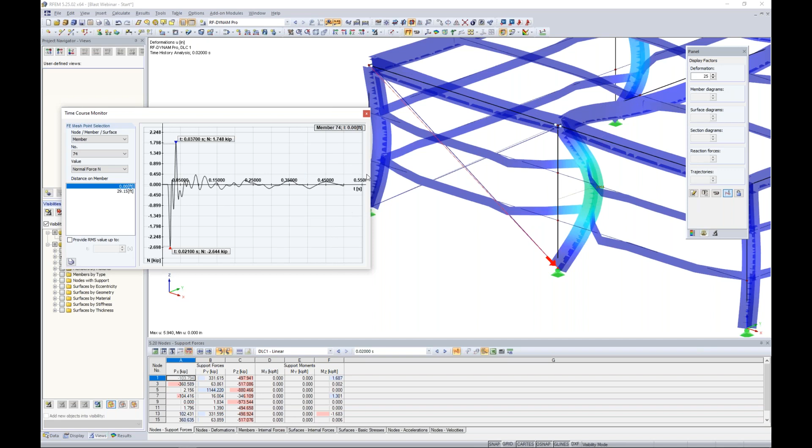So how can we overcome this if we know that these nonlinearities are extremely important for our blast design? This is where we're going to go back into the add-on module. We can go up here to the current module, RF-DYNAM Pro, and we're going to activate here nonlinear time history for time diagrams. You'll notice that none of my tabs changed here.

In fact, my time diagrams that I previously defined, we're going to use those again. Under the dynamic load cases, I'm only going to make a copy here of my linear load case, and we'll call this one nonlinear. What the nonlinear time history add-on module extension does is it releases these two nonlinear solvers. So now we have the nonlinear implicit Newmark analysis as well as the explicit analysis solver.

Now for something like a blast load, an impulse load, it is suggested to use this explicit analysis, and that's what we'll be using today.

Under the time history analysis, again, because we made a copy, nothing changes here. The only modification that we want to make is the time steps for calculation. Remember, I said that when you consider a nonlinear analysis, this requires a much, much smaller time step. That's just because we have these extremely rapid changes under such short durations that you have to have a very small time step to accurately account for this. So under the full precision here, we make this so small, in fact, that it will be 1 times 10 to the minus 6 power. So very, very small.

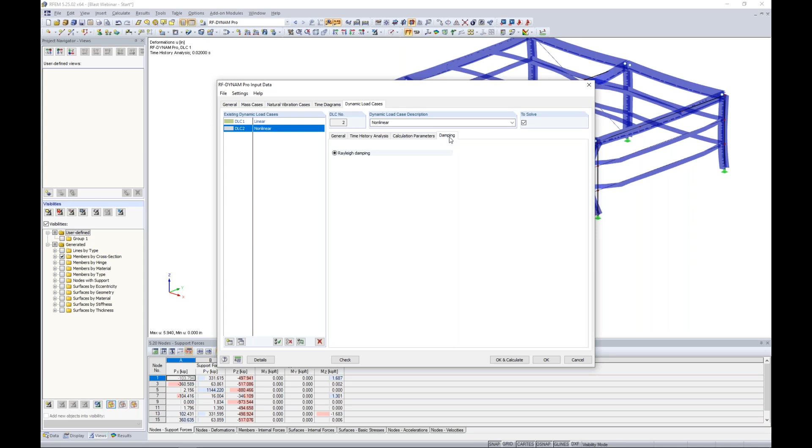Realistically, under calculation parameters, notice only the diagonal matrix is available for this particular explicit solver. And for damping considerations, we can leave this the same, but the program will only use the alpha coefficient for this particular solver. So as you can imagine, this is going to take a little bit longer to solve than what we saw with our linear.

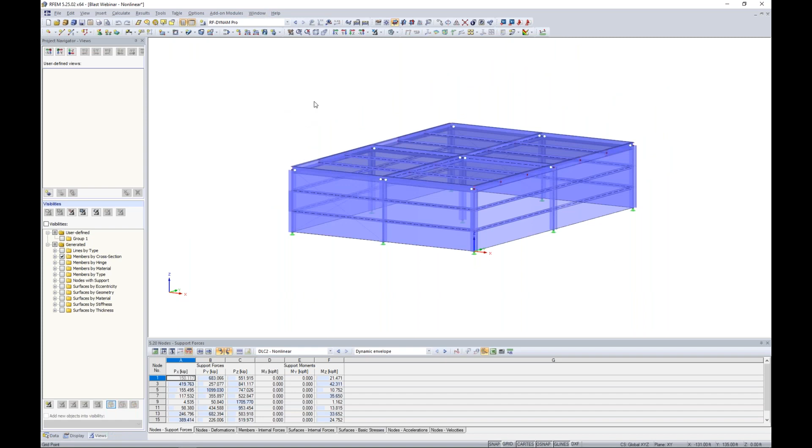So what I went ahead and did is run the results for us and open up a saved model. Once those results are done running, we'll be given back into RFEM. In my table 5, I now have my natural vibration case, my linear dynamic load case, but now I have my nonlinear dynamic load case available to me as well.

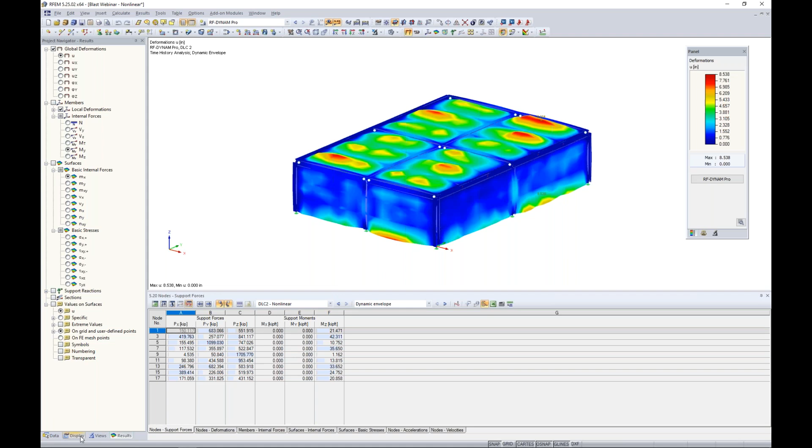Now, we don't need to cover all of the various ways to view the results. It's identical to what we just saw with our linear analysis. But what might be interesting to us is if we go ahead under the Views tab and we turn off our surfaces here, and let's focus in on that tension-only member.

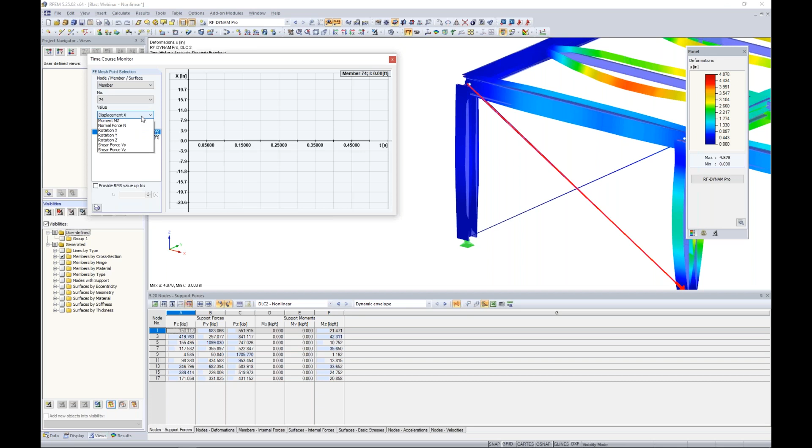So I'm going to launch my time course monitor. I'm going to select that particular member that we saw before. It doesn't matter whether we choose 0 or 29.15, the start or end of the member, but I do want to view the normal forces. And now you can see how drastically different this looks.

This member is only taking on tension forces. The minute that it sees any type of compression, it's taken out of the analysis, but when tension is reintroduced into the member, it is activated again. So we're only seeing those positive forces here.

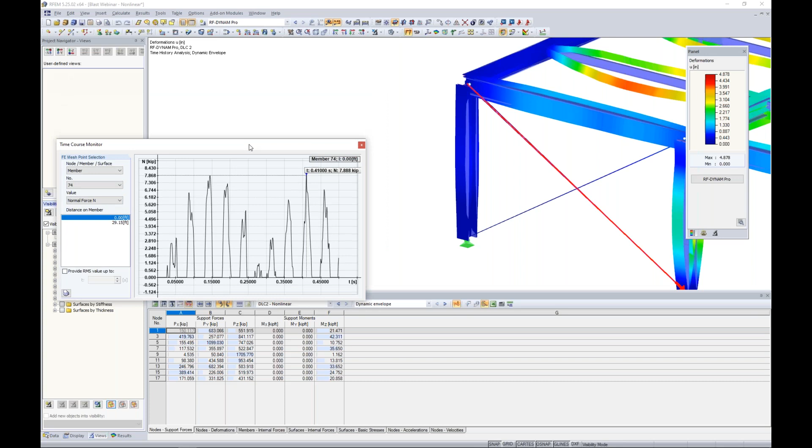We also have the ability, if we take a look at our results tab here, let's activate the animation. I thought this might be interesting for you guys to see, that when I go ahead and run the global deformations here for the structure, you can actually see the element, and let me also turn this into wireframe view. These two elements are deactivated and activated, so you can see them graphically turn on and off as we move through the total duration of this time history analysis.

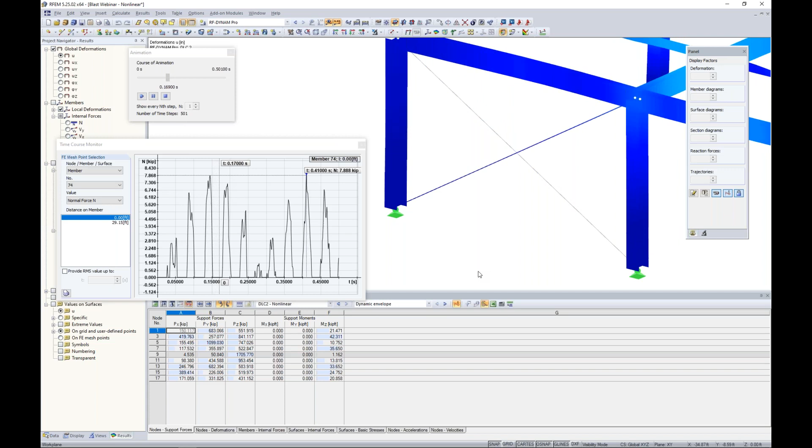So certainly a big advantage here if we have those nonlinearities that we want to account for with this blast analysis or any type of nonlinear time history, we would want to utilize these nonlinear solvers.